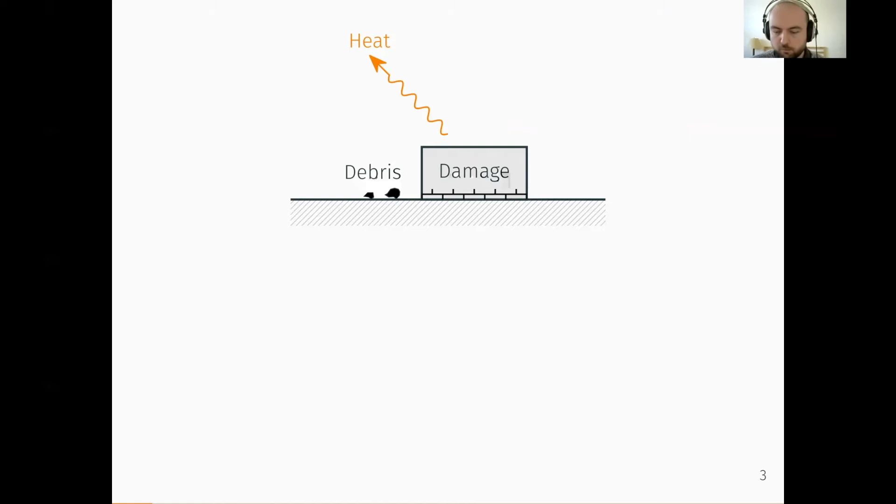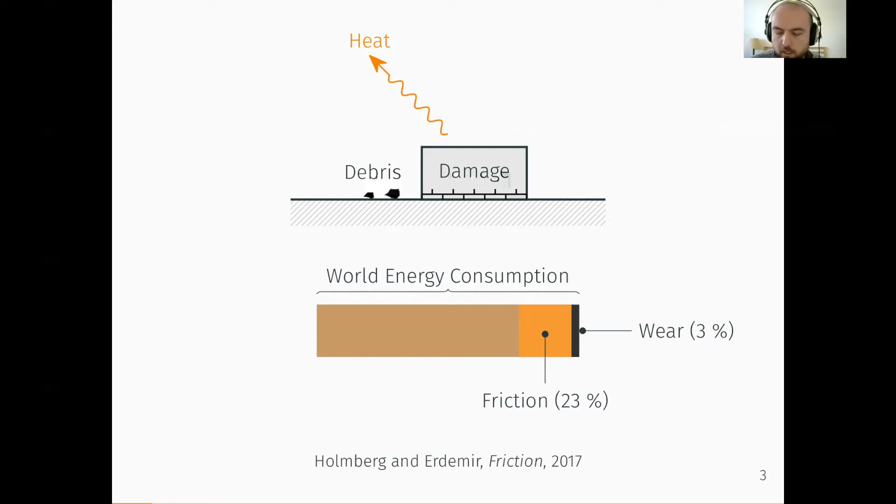As a researcher, I'm interested in solid interfaces and what happens when two solids slide on top of each other. You might know that you have energy dissipation due to heat. You might also have damage at the contact interface, and this damage can lead to the formation of third-body debris particles that leads to wear of materials. One of the reasons we're interested in this problem is because together friction and wear account for 26% of world energy consumption, and since we still rely heavily on fossil fuels to generate energy, these turn out to be large amounts of CO2 emissions.

Friction and wear are phenomena that occur virtually on every length scale. We can have friction for earthquakes, for example, at the kilometer scale. We can have friction at the nanoscale. In some cases, for friction, we want to maximize the amount of energy dissipated. Sometimes we want to minimize it. And for wear, wear is basically inevitable, but it dictates the lifetime of our engineering systems, for example, bridge bearings here. So to harness those two phenomena, we need to have good predictive models to be able to design efficient systems.

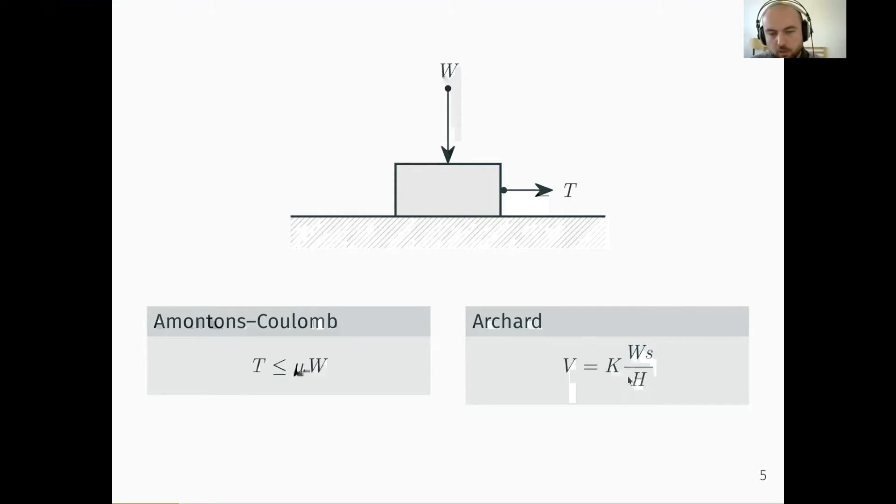However, there are no predictive models for either friction or wear. Here I selected two rather simple models for friction and wear. You have the familiar Amontons-Coulomb friction law with the friction coefficient, and simple wear law, which is the Archard wear law, which states, if you're not familiar with it, that the wear volume is proportional to the normal force times the sliding distance divided by the hardness of the materials in contact. What both of those models have in common is that they need a coefficient: K is called the wear coefficient, and mu is the friction coefficient. Those coefficients need to be informed with experimental measures, and therefore, those models are not predictive.

What they also have in common is a linear dependency on the normal force and an absence of dependency on the apparent contact area. In both of those equations, the size of the contact, the apparent contact, does not play a role. We've known this for a few centuries now, because Da Vinci actually did experiments on this, where he was measuring the static friction force for different orientations of a single block, and he found that the orientation of the block had no bearing on the static friction force. Now, the reason this is the case is due to inevitable roughness that occurs at the interface. And roughness is a fundamental aspect of tribology, and it governs a lot of what we observe at the macro scale for friction and wear.

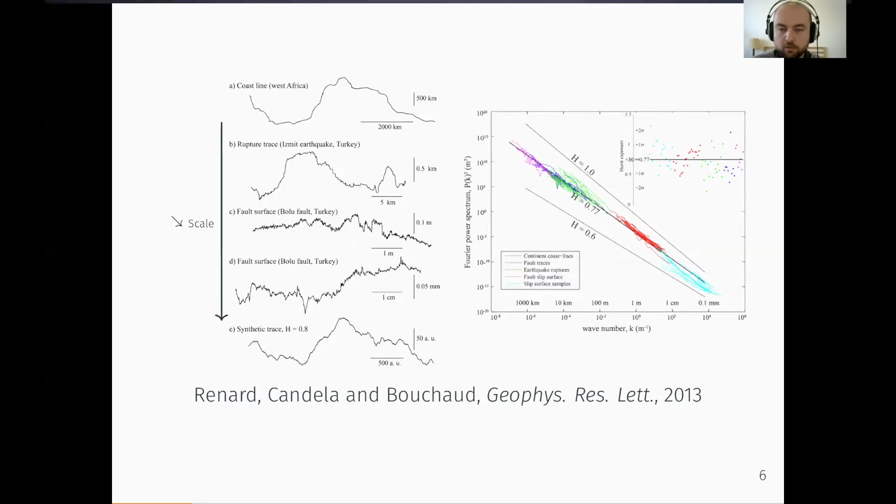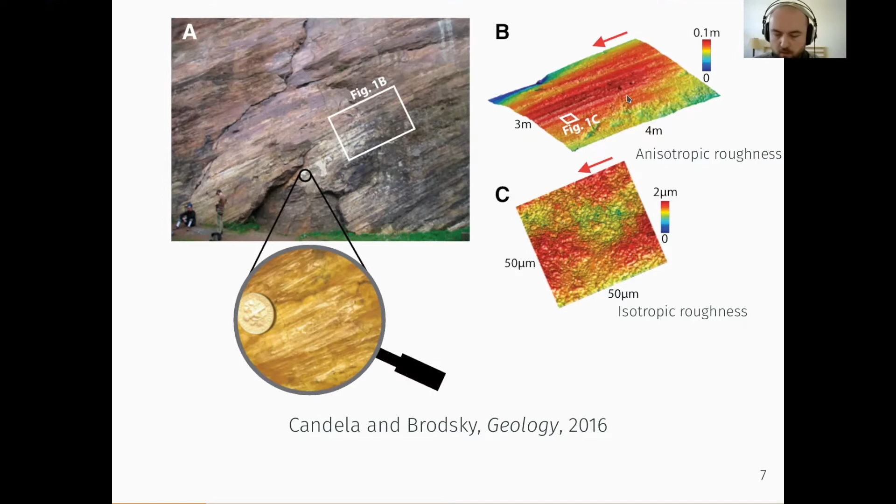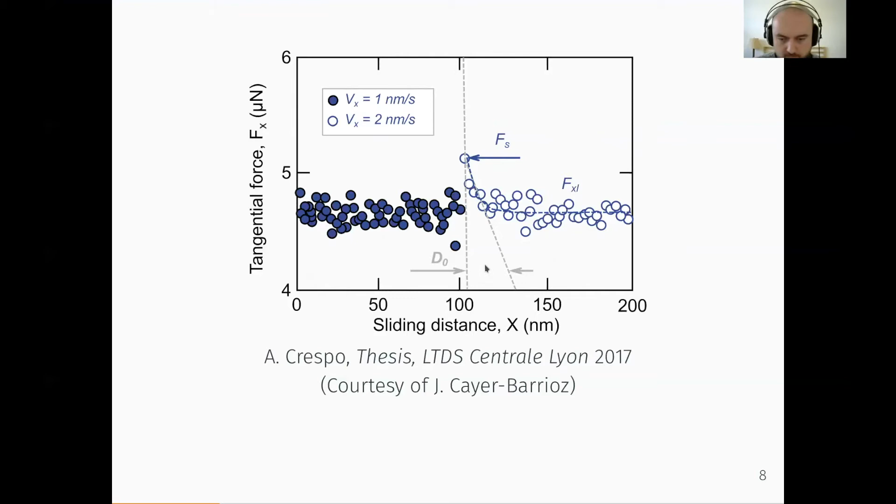What I want to discuss today are two approaches which I think are complementary and necessary to model friction and wear. There's the continuum side of things, which I focused on during my PhD, which I think is necessary to bring some of the mechanisms we know from the nanoscale up to engineering scales.

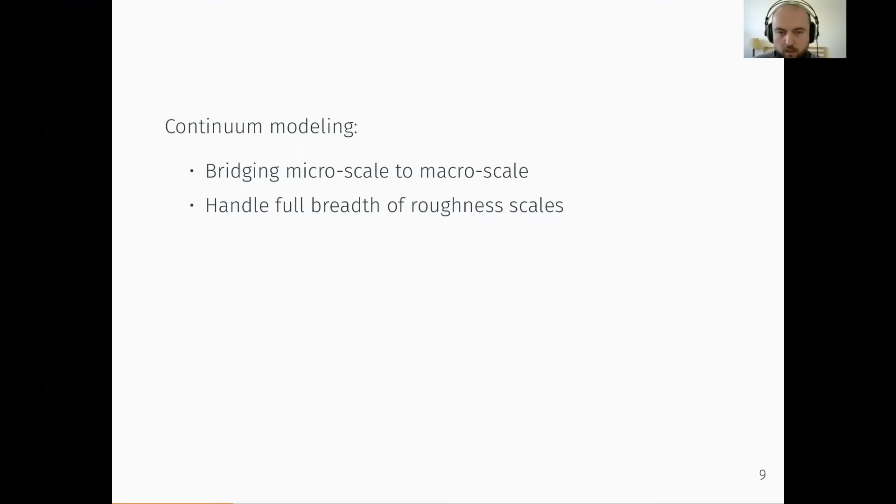And to do this, we need to account for the full breadth of roughness of natural surfaces. What I've been doing during my postdoc is focused more on atomistic modeling, exploring the physics of nanoscale friction and wear. Those can be used to inform the continuum scale models that are going to be used to homogenize and scale up to engineering scales.

The presentation is split into 3 parts. The first two deal with continuum modeling of rough contact interfaces. We'll talk about this in the first part, and in the second part we'll discuss plasticity and its influence on crack nucleation at contact interfaces. The last part will deal with molecular modeling, where we'll discuss aging friction at the nanoscale.

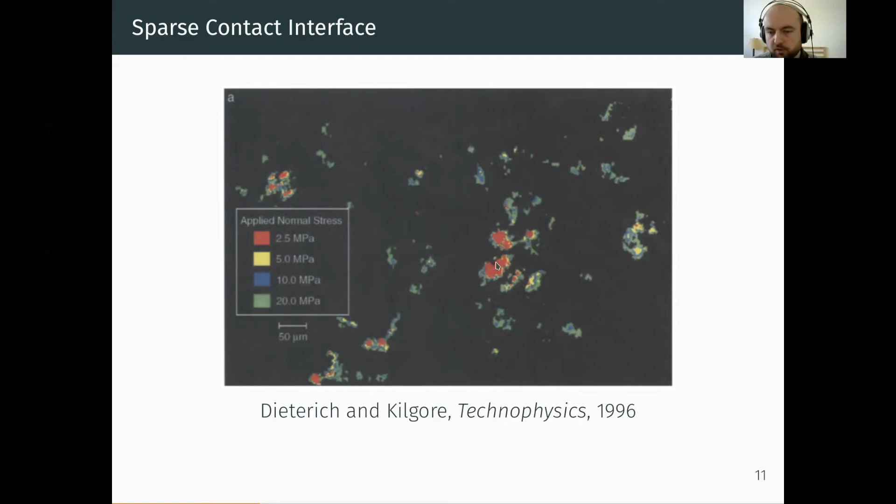You might think that since the true contact area, where forces are transmitted, is so small compared to the apparent contact area, the local pressures must be really high. They are actually high enough that they cause irreversible damage or deformations in the bodies in contact. We've known this for a while, but I find the experiments by Daniel Bonn and his team to be really visual in showing this.

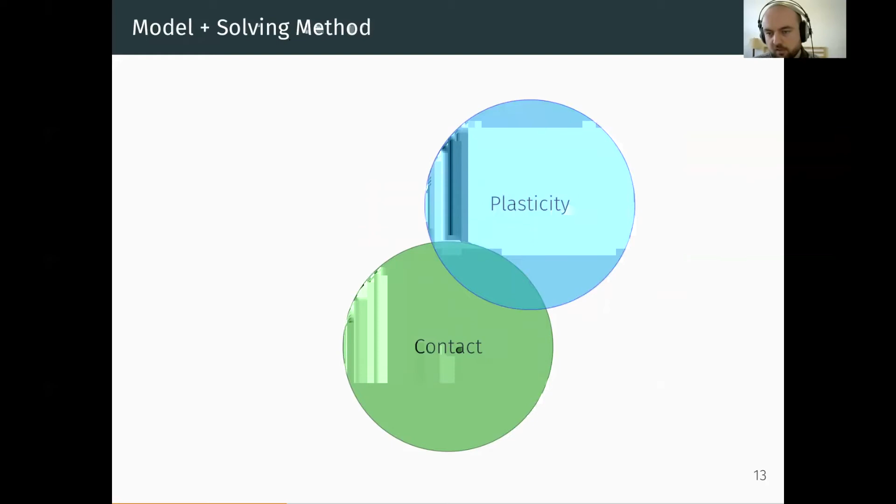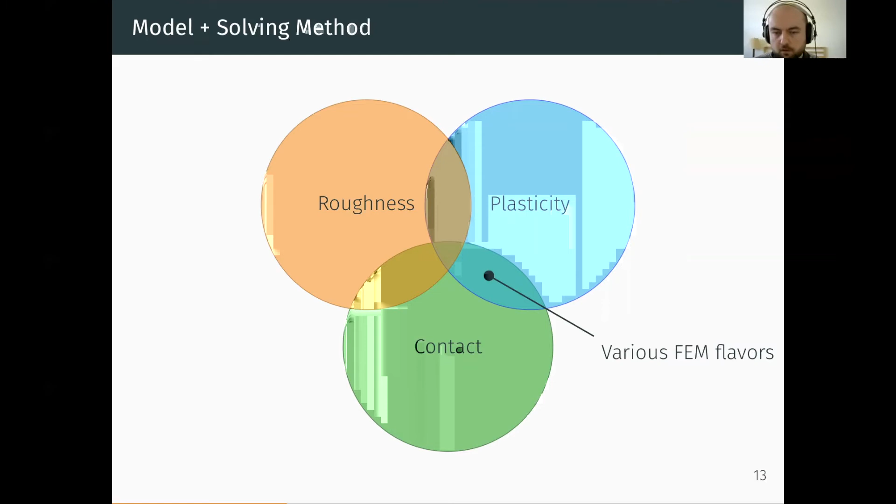And there are methods that do both. There are various finite element contact schemes that can handle both of those. But we also have an additional constraint, which is to account for the multi-scale aspect of roughness. This usually means we have to discretize our contact interface very finely, because we want to represent all the details of the true contact interface.

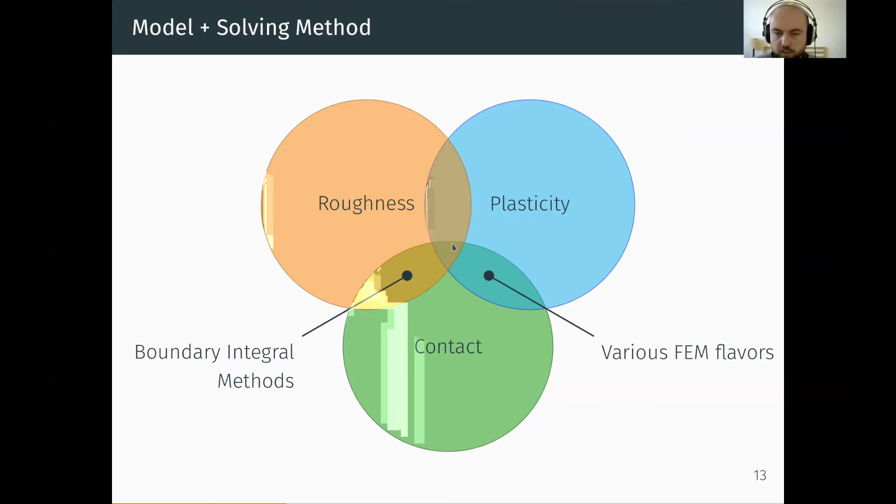And there are methods that do roughness and contact, but don't do plasticity. Those boundary integral methods are very interesting, and I will go into them a bit later, but we want to be really at the center of this Venn diagram here and do all 3 things at once.

So some people have done that with finite elements, namely Mark Robbins and Jean-François Molinari. However, there are some shortcomings to using finite elements. One is that in order to avoid any effect of boundary conditions on the contact interface, you need to discretize a volume larger than the volume of interest where you expect plastic deformations.

You can alleviate some of the computational burden by using a dynamic relaxation scheme, but for plasticity this may not be an appropriate way to model plasticity because it's path dependent.

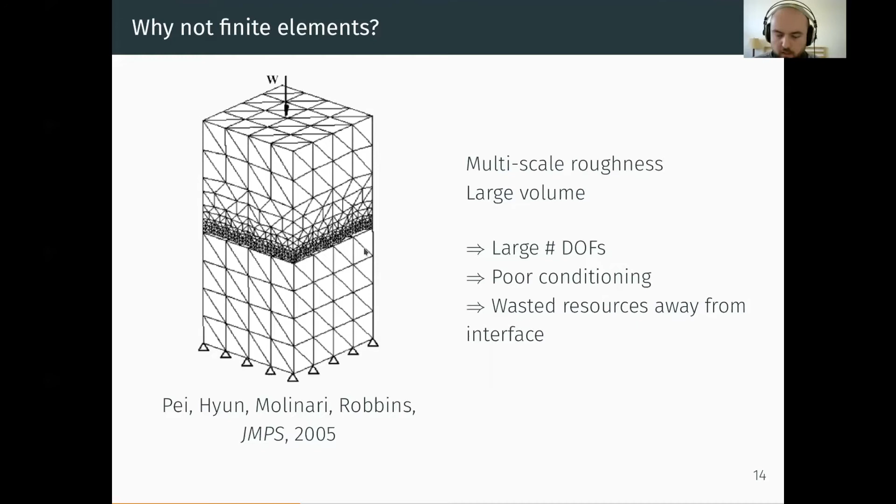So there are some issues with finite elements, and ideally we would try to solve those issues by having a numerical method which would allow us to discretize as finely as we can the contact interface, and a part of the volume where we expect to have plastic deformations. Anything else outside of this would be taken care of because it's elastic and we wouldn't need to actually explicitly discretize it.

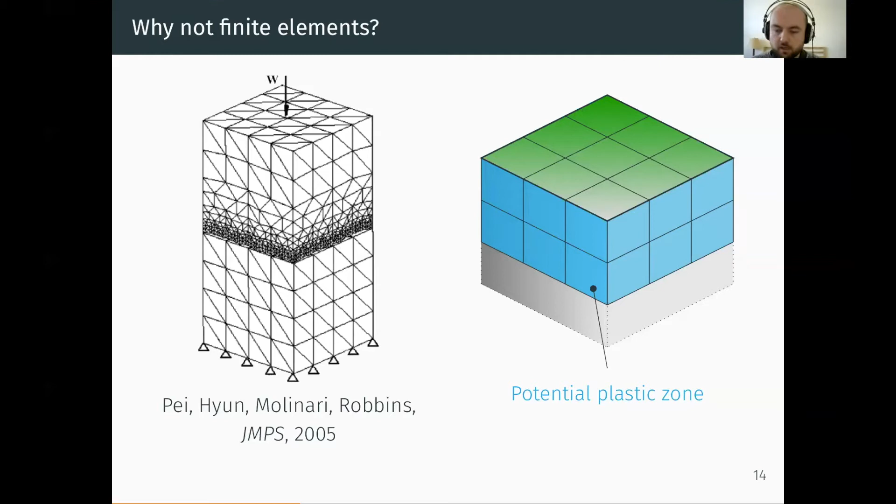So I've talked about methods that work really well for elastic contact with multiscale roughness, and those are boundary integral methods. They revolve around the principle that you can express equilibrium surface displacements as a function of contact pressures using this convolution integral, and the kernel you use is the displacement due to a point force acting on an elastic half space.

So if you can write your equilibrium using this equation, you can also write your potential energy, and elastic contact basically becomes a minimum principle of minimum potential energy under the constraint that the separation of the two surfaces should be greater than or equal to 0.

Now, the main computational burden of this kind of method is to compute this convolution integral efficiently. One of the best ways to do that is to go to the Fourier domain to be able to compute it.

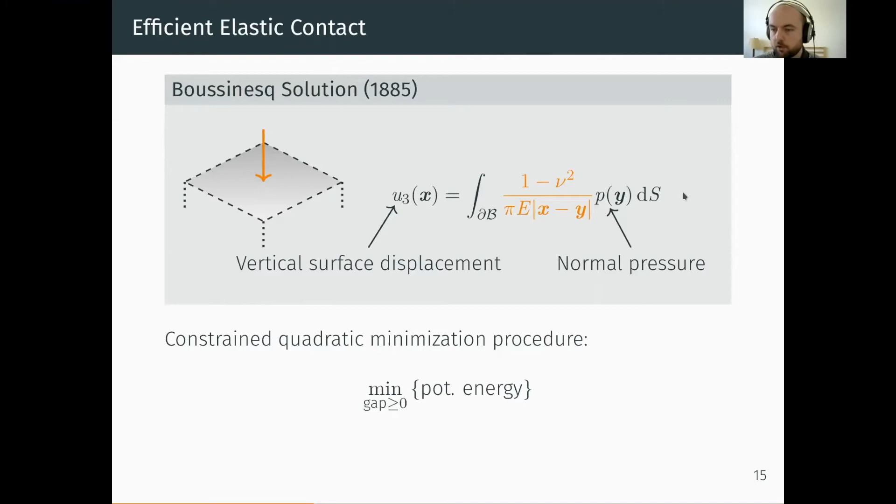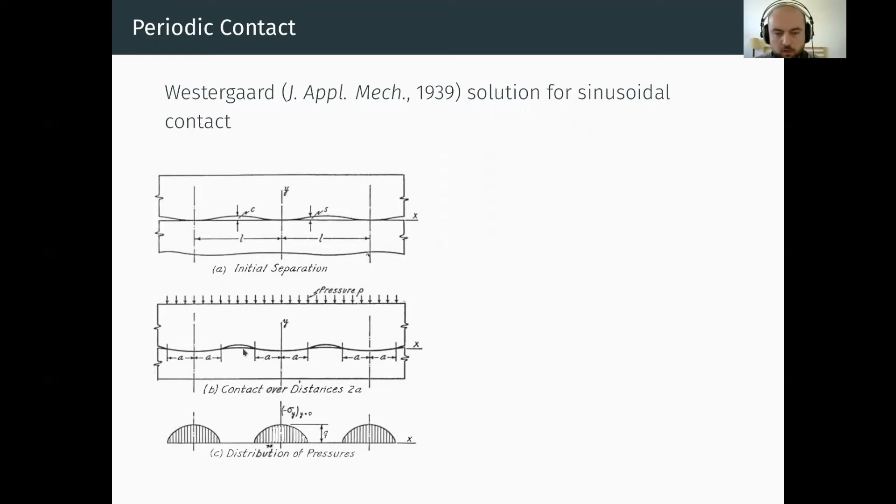Historically, that's what people have done. They've used a contact solution from the late 1930s, which is the solution of a sinusoidal rigid surface on top of an elastic half space. The contact solution is very interesting because as you push the contact until you have no surface separation, you have a correspondence between your displacement and the sinusoidal contact pressures, a proportionality between the two.

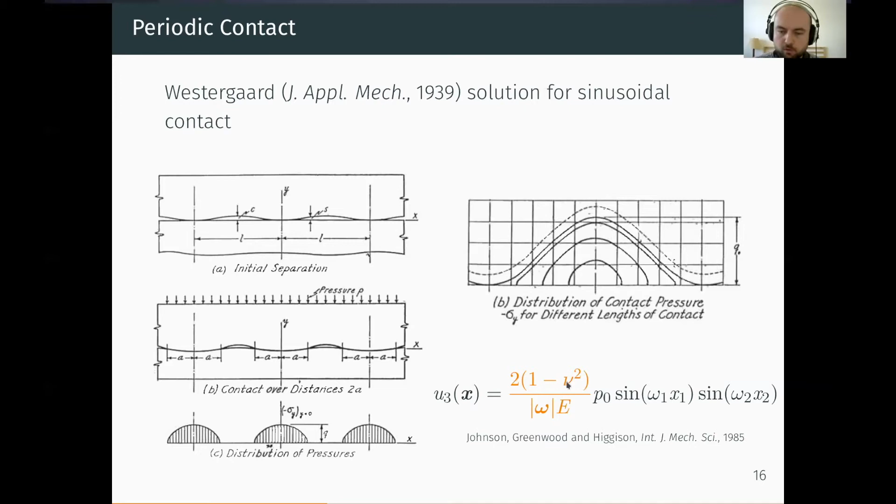This coefficient can be generalized to 2D if you have a 2D surface. You can very well imagine how this can be efficient in computing a convolution integral, because using methods such as the fast Fourier transform, you can decompose contact pressure into a set of modes, apply this coefficient to each mode, and then recompose your equilibrium surface displacements using the inverse Fourier transform.

So those are, in a sense, FFT-based boundary integral methods. They're very nice for elastic contact because they're really efficient. They focus all of the computational resources on the interface — we don't discretize anything inside the volume of the bodies in contact. They're really fast because of the fast Fourier transform, and rather easy to implement because FFT libraries are readily available.

So when I set out for my PhD, my initial goal was to try to retain those features to do elastoplastic contact.

One way I could have gone, and something that people actually do in the literature, is to leverage the principle of hardness. Basically, if you have an indenter that you push onto an elastoplastic solid and you increase the load, if you measure the mean pressure at the contact, this pressure increases and saturates at a level that's about 3 times the yield stress for a spherical indenter.

So you could use this physical principle to modify your elastic contact problem and say that you want to minimize the potential energy under the separation constraint, and an additional constraint which states that the contact pressures should always be smaller than the hardness of the material.

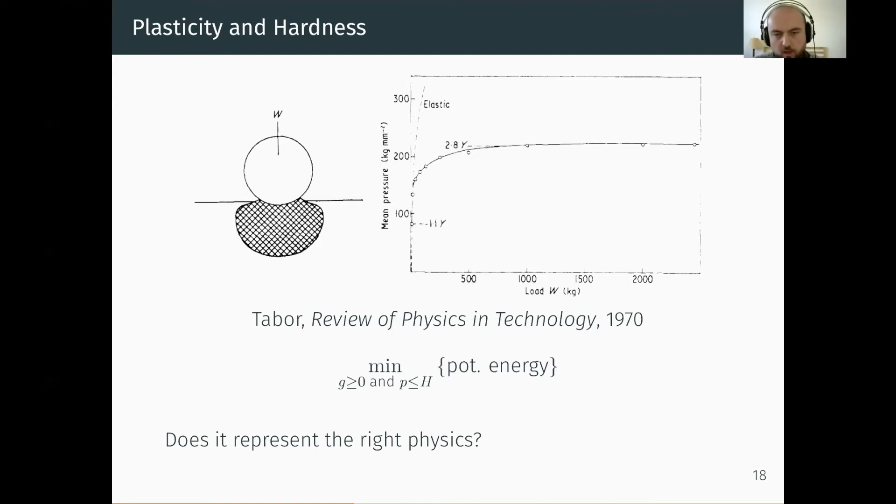What I did was to devise a method based on volume integral representations. So I have a half space with contact tractions and a distribution of plastic deformations, and what I want to do is express my equilibrium displacements as a function of those two quantities.

For the contact tractions, I have this boundary term, which is very similar to what I just showed before with boundary integral methods. And I have an additional term that takes care of the plastic deformation.

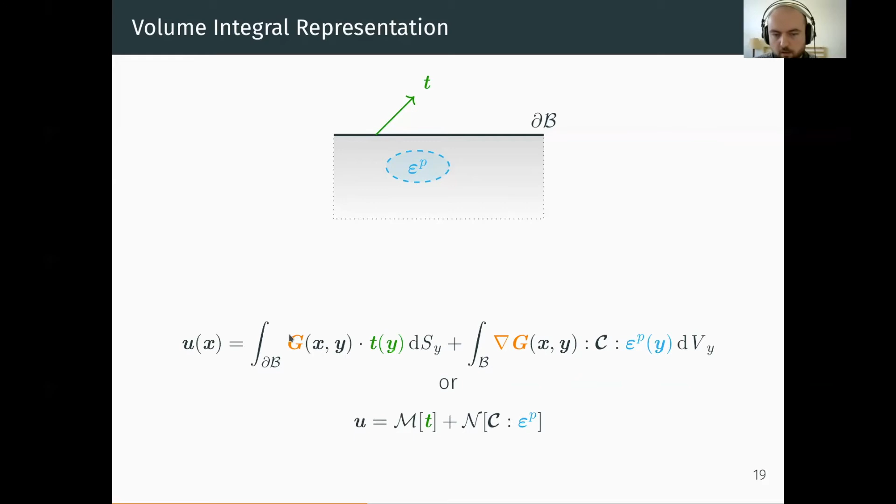This expression here I can only write if I choose wisely the Green's function, G — this is just a shorthand for later on in the presentation. So I need to choose a Green's function that is appropriate so I can write this equation.

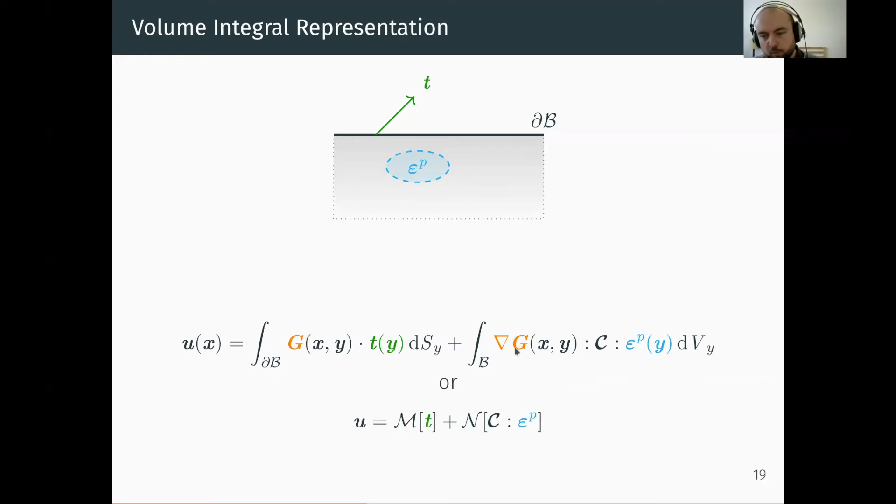Typically in integral methods, people use the Kelvin fundamental solution as a Green's function, which is a point force acting inside an infinite elastic medium. However, I cannot use this Green's function to write the previous equation.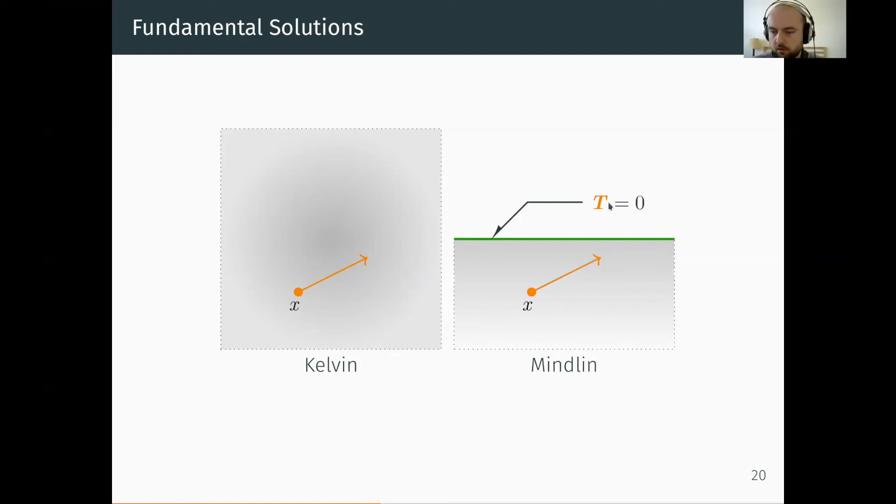So the tractions of this solution, the surface traction, should be equal to zero. This is what allows me to write the integral I showed in the previous slide. So in order to compute equilibrium displacements, there's this boundary integral term, taken care of by the same methods I showed before with the FFT, and there's this volume integral term that I need to compute as efficiently as possible.

There is, in my problem, a translational invariance in two directions, y1 and y2, which means I could use 2D FFTs to accelerate the computation of this integral.

However, when I started my PhD, the Mindlin solution I have to use here, this G, was only known in the physical domain. So I would have to either compute the convolution in physical space using a different acceleration scheme than the FFT, such as a fast multipole method, but that would defeat the easy-to-implement condition I took. I could also use a discrete Fourier transform of this Mindlin solution, but that would introduce a sampling error, because I need to sample the analytical solution, and I'd also need to store all the Fourier coefficients, which takes up a lot of memory.

So what I did during my PhD was derive the Mindlin solution in a partial Fourier domain. I did a Fourier transform in the y1 and y2 directions, and solved equilibrium for the Mindlin solution directly in this hybrid system of coordinates. That allows me to cancel any sampling error I would have had from a discrete Fourier transform of the physical space solution, and also reduces memory cost because I don't need to store any Fourier coefficients — I have the analytical solution and can compute it on the fly.

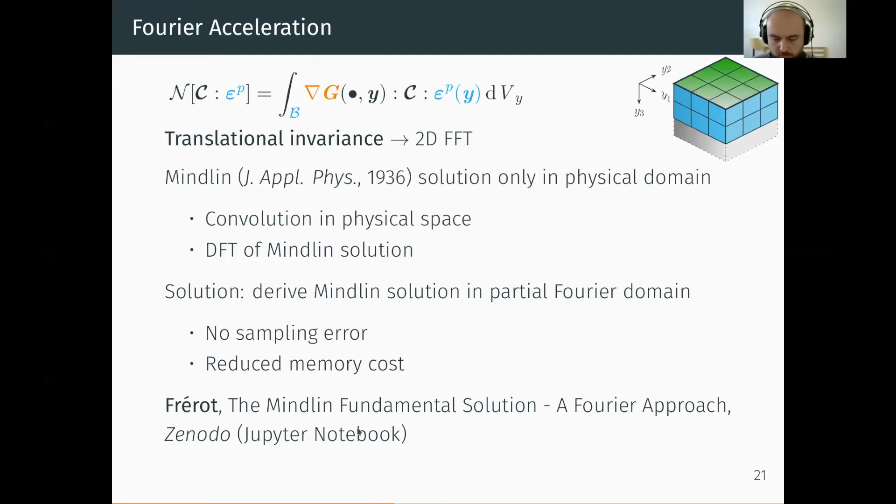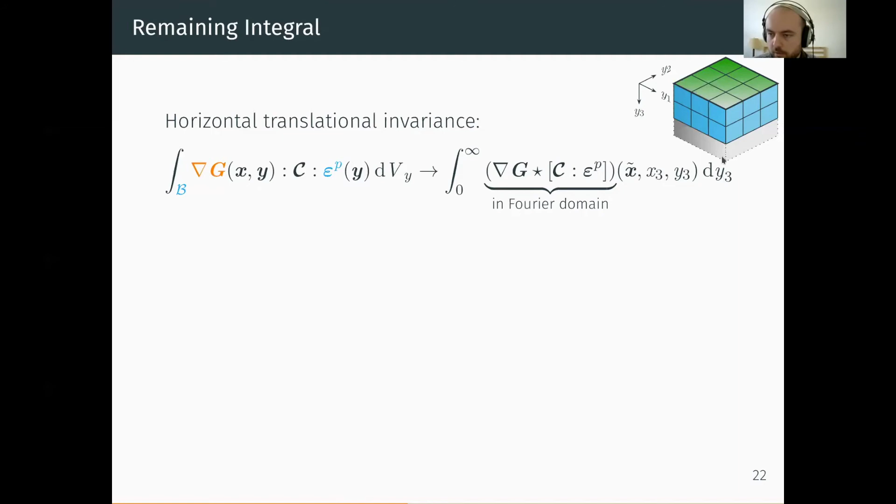Again, our goal is to compute this integral as efficiently as possible. I've shown that thanks to translational invariance we can compute part of this integral in the Fourier domain, but there's still a direction where we don't have translational invariance — that's the y3 direction. So we still need to integrate over y3.

Naively, if you look at this expression, for each value of x3 where you're interested in computing the displacement, you need to integrate over all the values of y3. So if you discretize, that would give quadratic complexity on the number of points in depth. However, thanks to my knowledge of the analytical solution of G, I can use some clever mathematical tricks to accelerate this computation, and finally recover the n log n complexity, which was my target from the start.

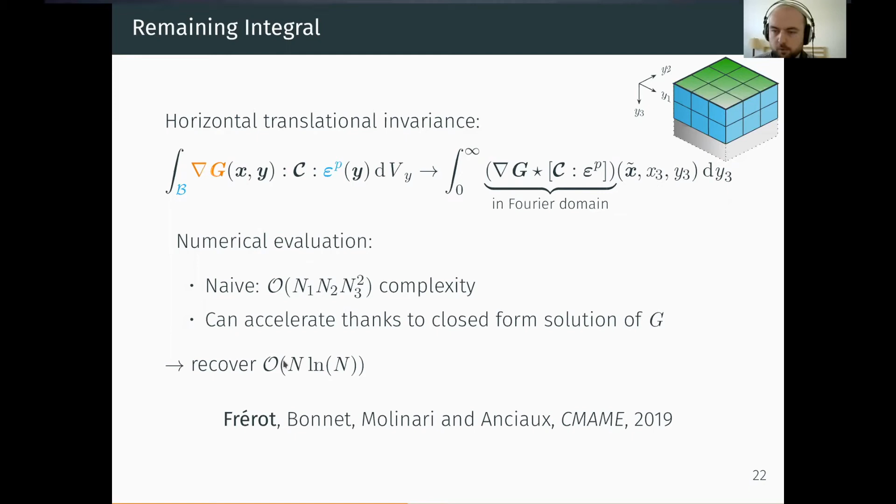Again, feel free to ask any questions about the details of this, or check out this publication if you want. So I can now efficiently compute equilibrium solutions if I have a set of contact tractions and a set of plastic deformations — both of those are unknowns — and I will now discuss how we find plastic deformations.

What we do is write this same equation, differentiate on each side to express deformation instead of displacements, and write it in incremental form. This gives the same information: I have the increment of total deformation as a function of the increment of contact tractions and the increment of plastic deformations. Here you can plug in any continuum plasticity formulation.

If you take something like a radial return from von Mises plasticity, the increment of plastic deformation depends on the increment of total deformation. So you have a nonlinear implicit equation, which can be solved if you recast the problem into a root-finding problem and solve with your favorite kind of nonlinear solver.

They do need to be matrix-free, though, because we don't want to assemble tangents for this function — those operators are full, and it would defeat the purpose of having worked all this way to get an n log n scaling for computation of equilibrium solutions.

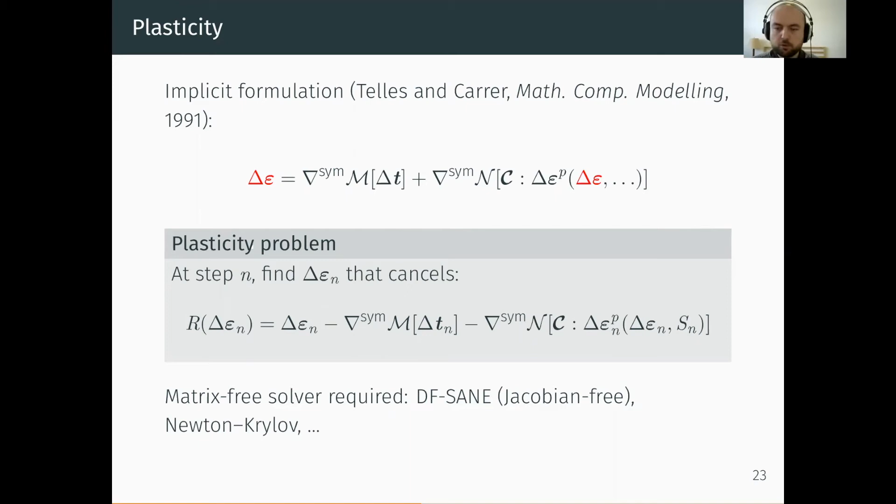Finally, if we put everything together, there are two parts in the elastoplastic contact algorithm. There's a contact part, which is basically elastic contact. It assumes that the plastic deformations are constant, and it iterates to find new contact tractions. When we converge here, we can send our updated contact pressure to the plasticity problem, which is this root finding problem. Once we've converged for this, we have new plastic deformations which inform our contact problem, and we go on and on like this until we've reached convergence.

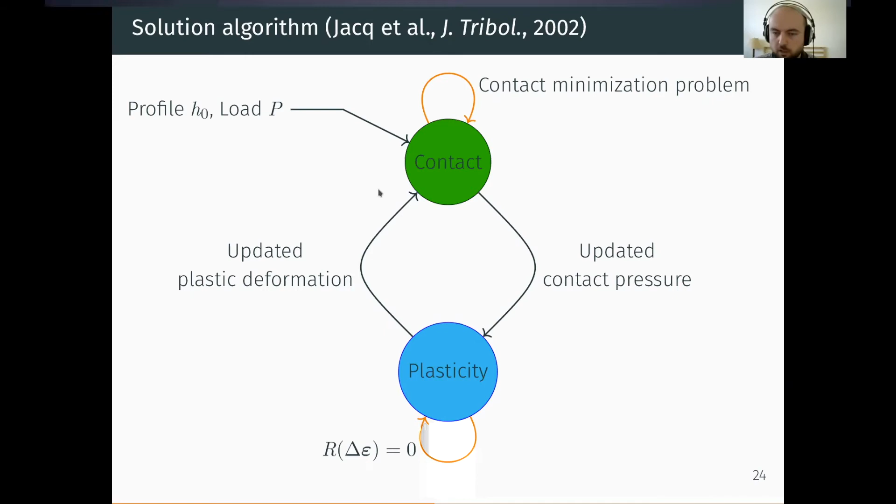This simulation was done with a code I wrote in C++, which is parallel and high performance. It's called Tamaas, and it's completely open source. Feel free to check it out if you want.

So I've showed you a way to do elastoplastic rough contact, and I'm going to try now to apply it to a practical problem of wear modeling and the influence of plasticity on crack nucleation.

So let's discuss a bit of wear modeling. There have been some studies in the past 5 years, particularly in Jean-François Molinari's group, on microscale or nanoscale mechanisms of adhesive wear. If you're not familiar with this, or if you missed Jean-François's seminar a few months ago, just to recap a bit: there's a critical length scale to nanoscale wear.

Basically, if you have two asperities that collide, and the contact is smaller than a critical length scale, you have plastic deformation, and you have no detachment of debris particles. So essentially, you have no wear.

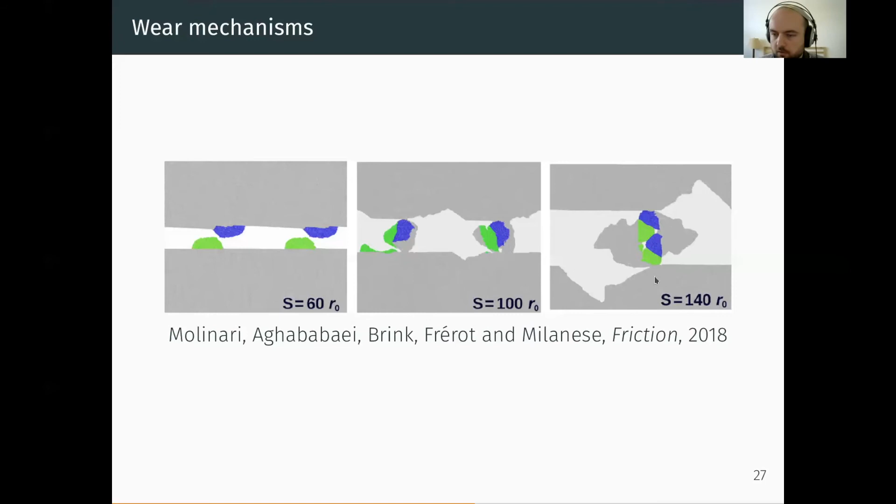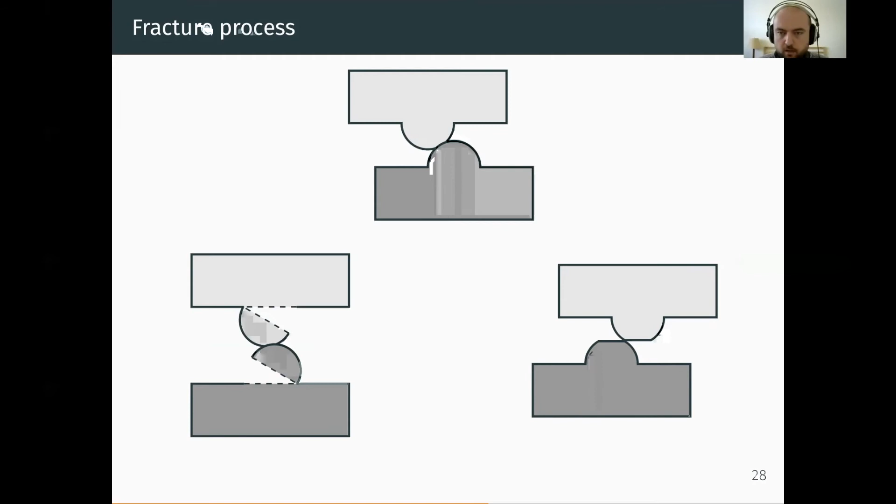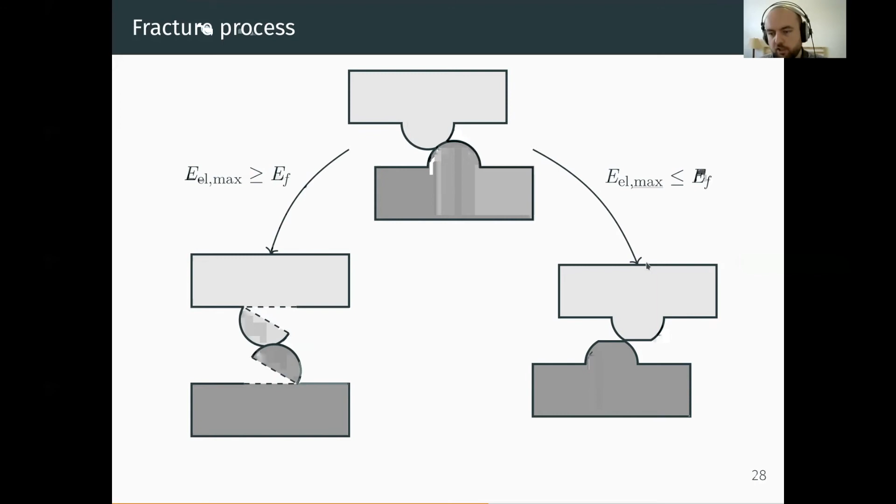Essentially, what those studies have shown is that adhesive wear is a fracture process. So if you have enough elastic energy that is stored in your contact to form new crack surfaces, then you're going to have this brittle mechanism which leads to detachment of a debris particle. And if you don't have enough energy, then you have plastic deformation and the asperities just pass each other, and there's no detachment of debris particles.

But that's not the full picture, because if you want to model such a phenomenon on the scale of a rough surface with many rough contacts, you need to do crack nucleation. So either by defect or stress concentration, or if you have a cohesive zone modeling, for example, you could use critical nucleation stress or other kinds of models which include crack nucleation.

And you need to have crack propagation with the energy dissipation, which I just showed, and interaction via bulk forces. This is something that can be done with molecular dynamics - it's very natural in MD to do it. And you have here the interaction between two cracks, which leads to the detachment of a single debris particle.

However, with the methods I've showed you earlier in this presentation, I can only do elastoplastic contact. I cannot do crack propagation yet. That's something I'm interested in, but cannot do currently. So because I have a homogeneous flat half space, I don't also have defect or stress concentrations. And so I'm going to focus on having a crack nucleation stress.

So the question I want to try to answer is: how do I quantify the probability that a microcontact in a rough contact interface with many, many microcontacts will have a crack in its vicinity? And in particular, I want to understand what is the effect of plasticity on this probability.

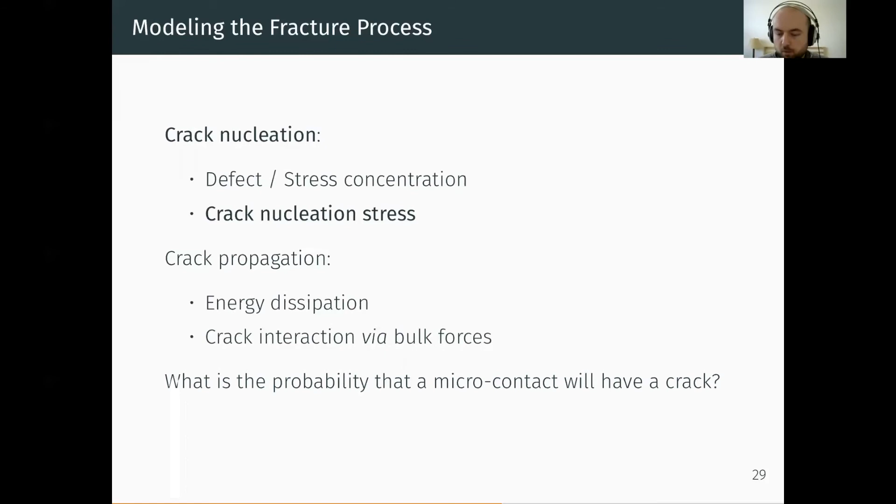To do this, I did a set of rough surface contact simulations, where on each simulation, I look at the principal tensile stress at the surface. And I look at zones where the principal tensile stress is larger than the critical stress for crack nucleation.

I did two sets of simulations. I did a set of simulations with a full description of plasticity, with von Mises plasticity in this case, using the method I described to you. And I did also a set of simulations using this elastic contact with added hardness condition. This is what I call saturated plasticity.

So what I do to compute this probability that a contact will nucleate a crack is I count how many crack nucleation sites I have in my total system, and I divide it by the true contact area. This quantity turns out to be proportional to the probability of forming a crack.

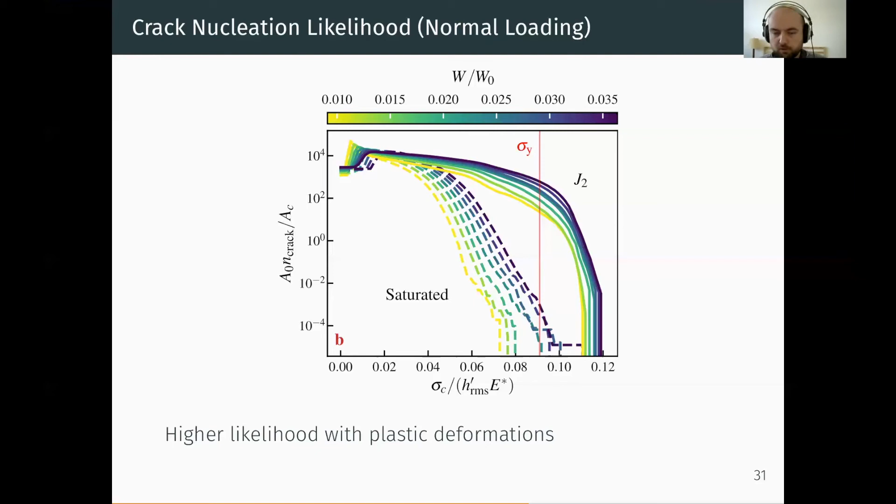I also did simulations where I do a normal loading and apply a shear stress to simulate the onset of sliding. In the saturated case, where deformation is basically elastic, I have an increase in my crack nucleation likelihood as I increase the load, because the tensile stresses in the system increase. But in the case of having a full description of plasticity, I don't have this increase - the probability is basically unaffected by the application of a shear stress in this case.

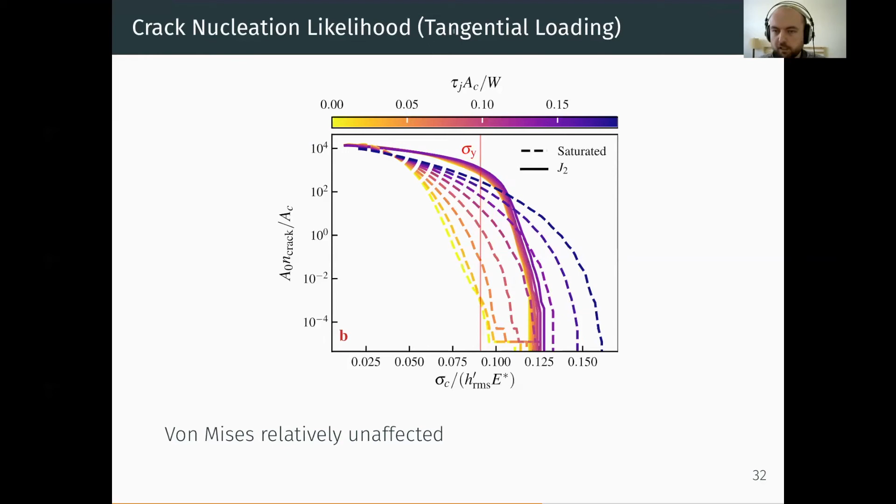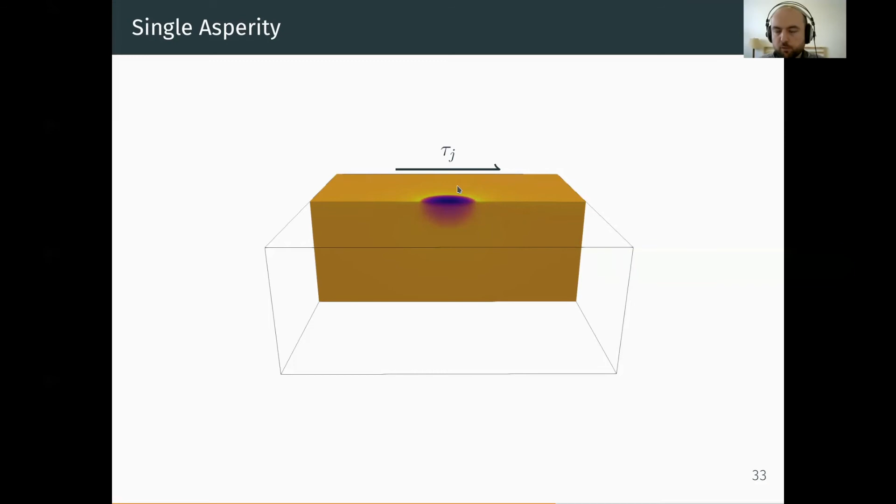To rationalize these observations, I did simulations of a single asperity where I push a spherical indenter onto an elastoplastic half space. I shear it with tau j, and I compute the principal tensile stresses at the surface. What I get is this curve of sigma 1 as a function of tau j.

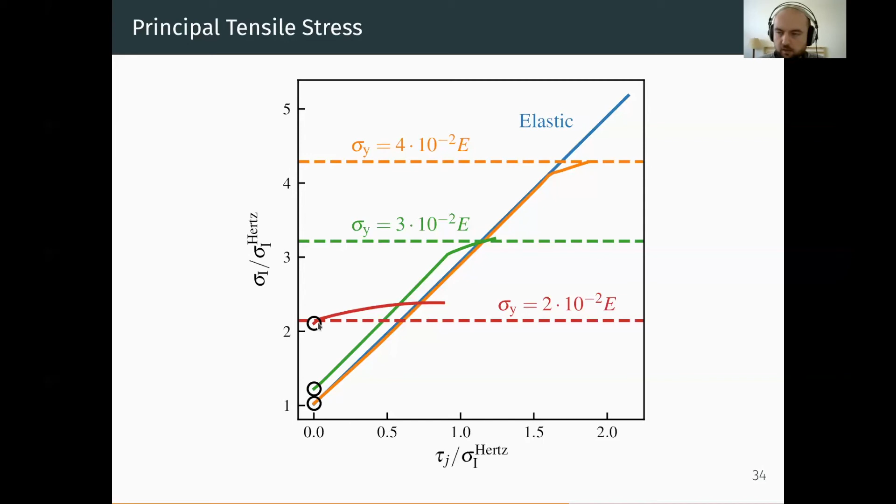This is when tau j is equal to 0 - this is pure normal contact. As we get softer and softer, as we decrease the yield stress, we have higher tensile stresses in the system. This explains why we had a higher crack nucleation likelihood in the case where we had a full description of plasticity, because plastic deformations introduce tensile stresses. When those plastic deformations reach the surface, the effect of those additional tensile stresses is the largest. So we have subsurface plasticity that introduces tensile stresses and increases the crack nucleation likelihood.

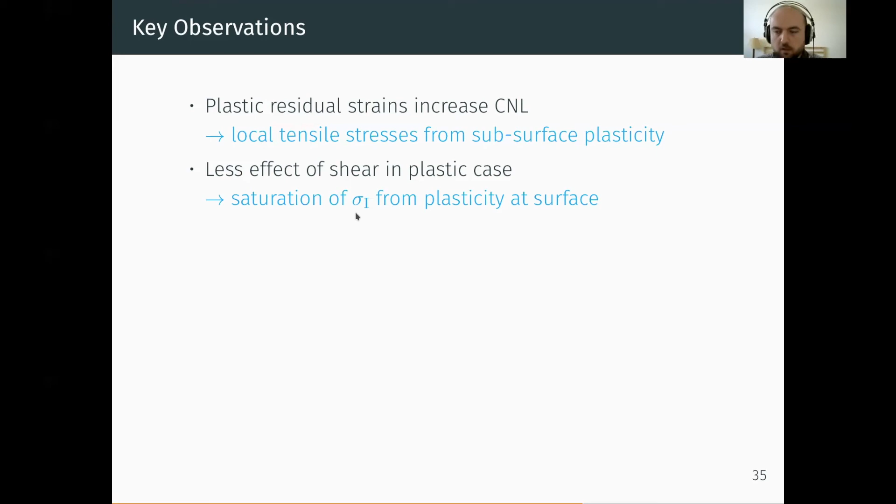And again, we see the saturation effect of sigma 1 due to plasticity, and this is why we don't see as much of an effect when we have shear stresses. So what I want you to take away from this is that a more ductile material, a softer material, is more likely to crack due to subsurface plasticity.

This isn't something that's been directly observed in experiments, but this is something we expect from Archard's wear law. We expect to have more wear volume as we decrease the hardness, as we get softer and softer materials.

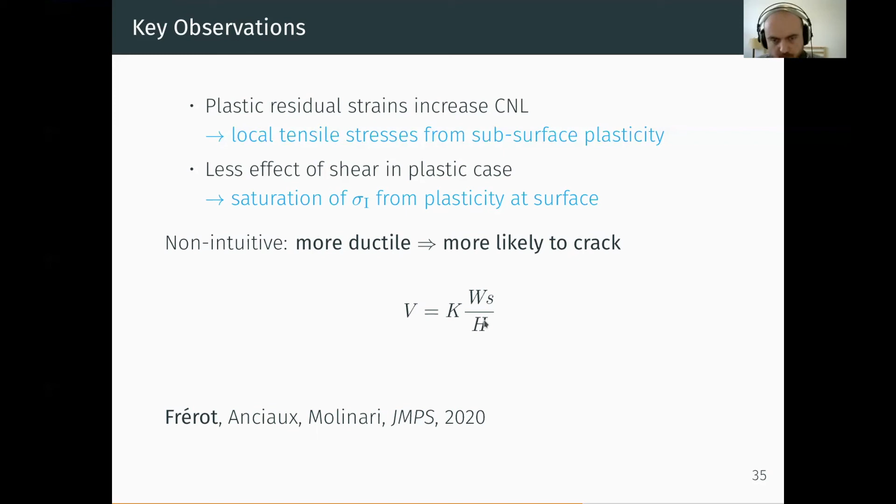So that's the end of the continuum part. I've showed you what I think is an efficient method for rough surface elastoplastic contact, and I've applied this method to trying to compute a macroscopic quantity, this crack nucleation likelihood, on a rough surface interface for adhesive wear.

Now, when I started my postdoc, I wanted to improve my knowledge of what happens at the nanoscale, of the physical phenomena that actually give rise to the macroscopic picture that we see.

And I was fortunate to work on a very interesting project that deals with fatty acid coatings and their frictional properties. So those coatings, generally in solution, can be used to decrease the friction coefficient at the sliding interface.

What you typically do is you have a solution of a fatty acid such as this molecule, you spread it across your surface, and what happens is that this hydrophilic group tends to bind to the surface. And the molecules self-assemble into a monolayer. There's typically only one molecule thickness on top of the surface where the molecules bind. And the interaction between the tails of those molecules is what gives the decrease of the friction coefficient.

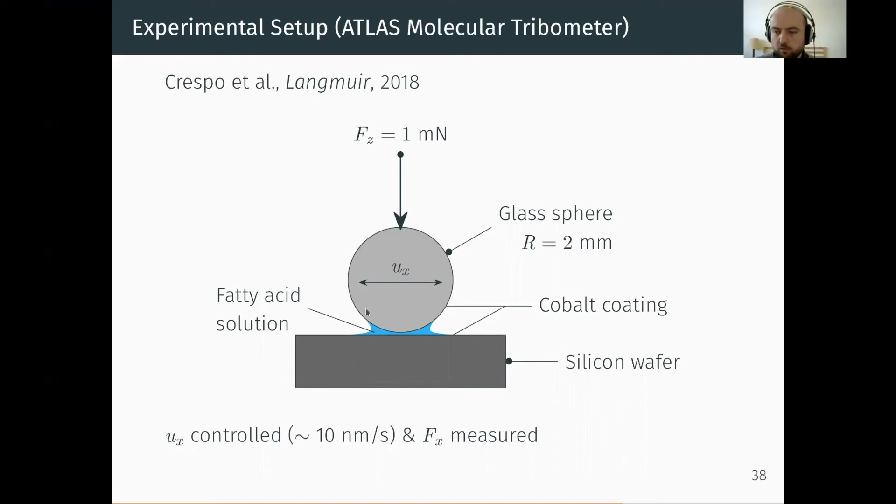One of the things they observe, which I think is really interesting, is an aging phenomena. What they do in the experiments is that they slide, they measure friction force, they stop sliding and they measure the force that relaxes to a non-zero value. And when they reslide, when they start sliding again, what they observe is an overshoot in the friction force. And this overshoot decays as a function of sliding distance over a distance that they measure is about 5 nanometers.

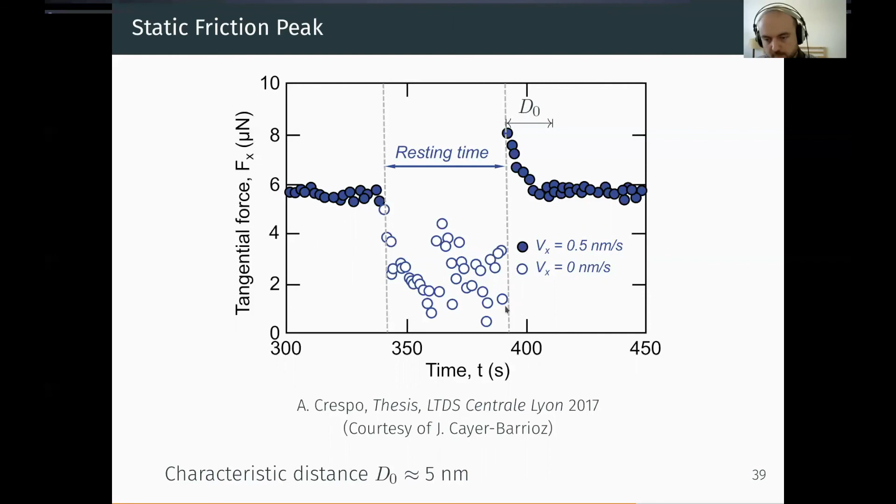What they also measure is the increase in this friction force, the magnitude of the overshoot. And what they observe, they measure this magnitude as a function of waiting time. And what they observe is a logarithmic aging of this overshoot in the friction force as a function of waiting time, for times that are above 2 seconds. For anything less than 2 seconds, they don't observe any overshoot in the friction force.

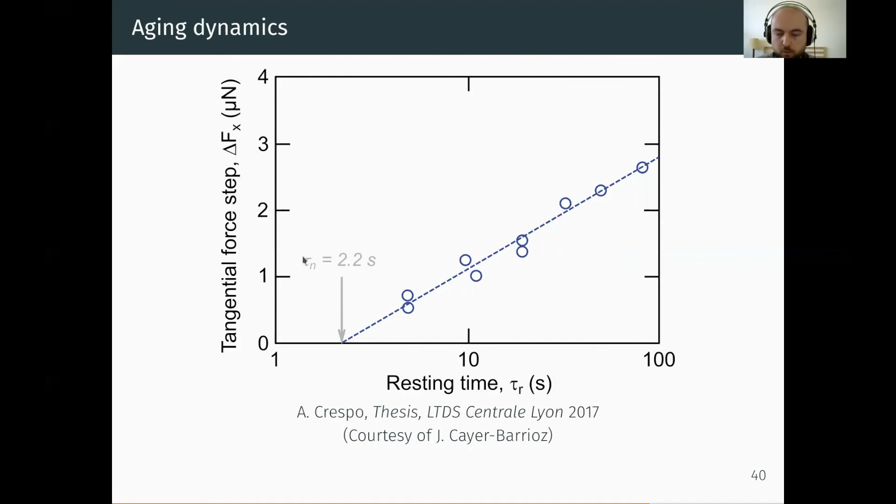So for those of you who are familiar with rate and state friction, this might ring some bells. If you're not familiar with it, it's basically a class of models that are a bit more generic than the Coulomb friction law, in that they include dependency on sliding rate and time as the state. And they were initially developed for rock mechanics, for rock friction.

I'm not putting all of the equations here. What you need to know basically is that there's a dependency of the friction coefficient on the logarithmic of a variable phi, which is called the state variable. And the state variable evolves with the following equation, which includes the sliding velocity and a characteristic distance, which is d0, called the rejuvenation distance.

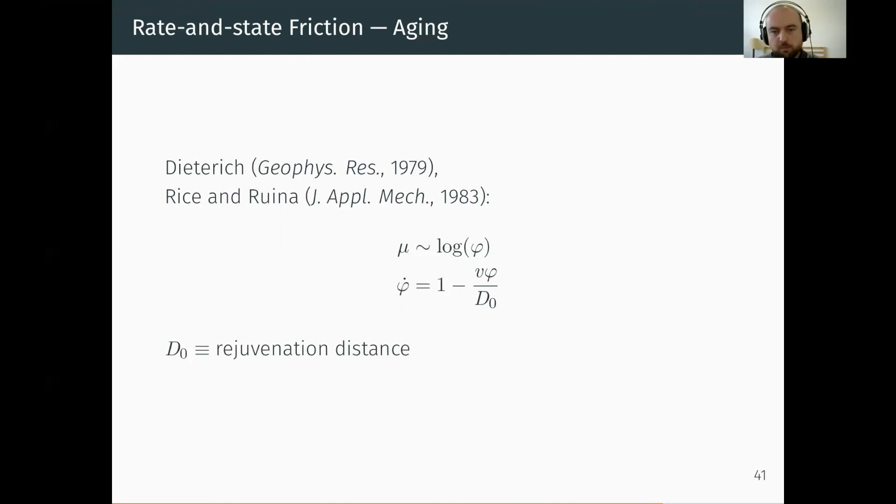So now when I started working on this, I asked myself what would be here d0 in the case where we have those fatty acid coatings. And if we have roughness at the surface, typically d0 is interpreted as the distance you need to slide in order to renew your microcontact population.

So what I did was to take the AFM roughness measurements from the experiments given to me by Juliette and do elastic contact simulations of two sliding surfaces. And what I measure is the survival contact fraction.

So the amount of contact area, the fraction of contact area at a given sliding distance that is common with the initial contact area. This survival contact fraction decays as a function of sliding distance until it reaches a steady state, where basically all memory of the initial contact area is lost. This decay occurs in my simulations over a distance of 40 nanometers.

So those simulations are purely elastic contact simulations that do not include those fatty acid molecules. It's therefore apparent that roughness alone is not sufficient to explain what they observe in the experiment with this d0 of 5 nanometers, because we are an order of magnitude larger.

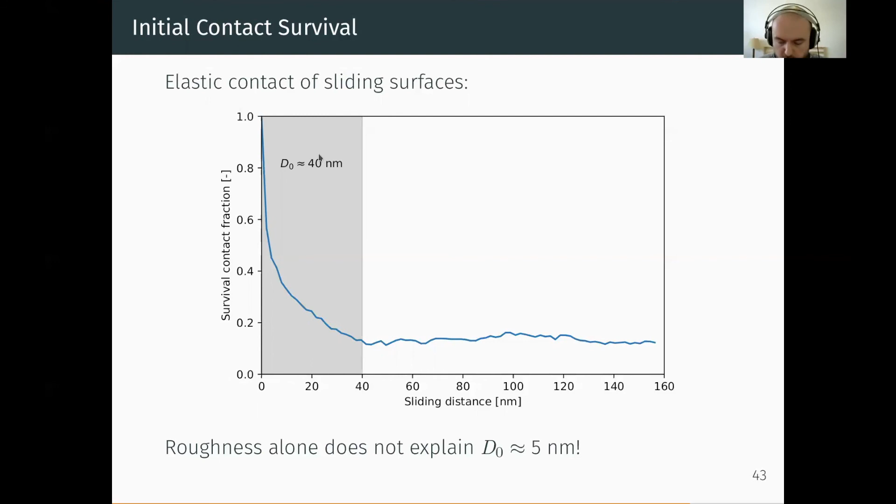So in order to get as close to the experiment as possible, I set up a molecular model for the fatty acid molecules that they use in the experiments. What I did was to use coarse-grained potentials, which allow me to save a bit on computational power, because each bead here represents 2 CH2 groups.

I set up a surface of those fatty acid molecules for the top and bottom surfaces, because we know that the friction interaction is going to emerge from the interaction between the tails of those molecules. I press with a normal force on this system, and I pull with a spring at a given velocity.

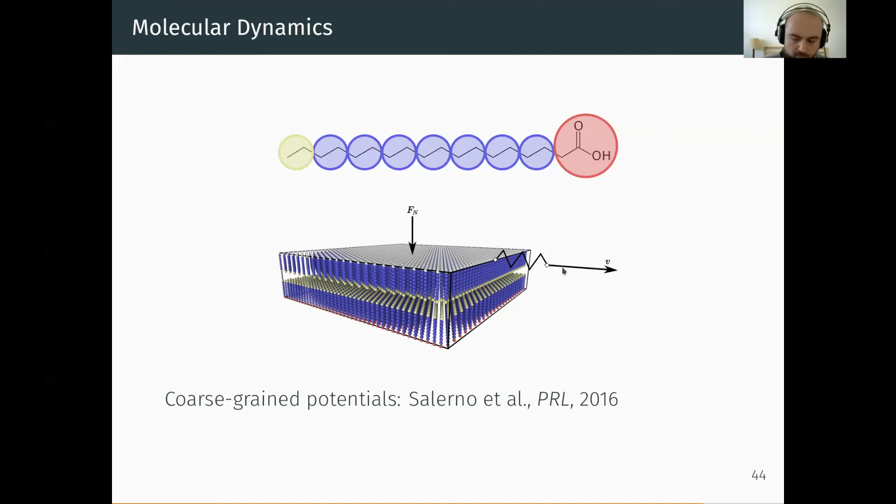Now, of course, I need to have roughness in the system, and I used directly the roughness data given to me from the experiments. I used it to generate periodic surfaces, and included this roughness into my molecular model. So at the end, I have a model that is about 200 nanometers by 200 nanometers, and I can compute my friction force.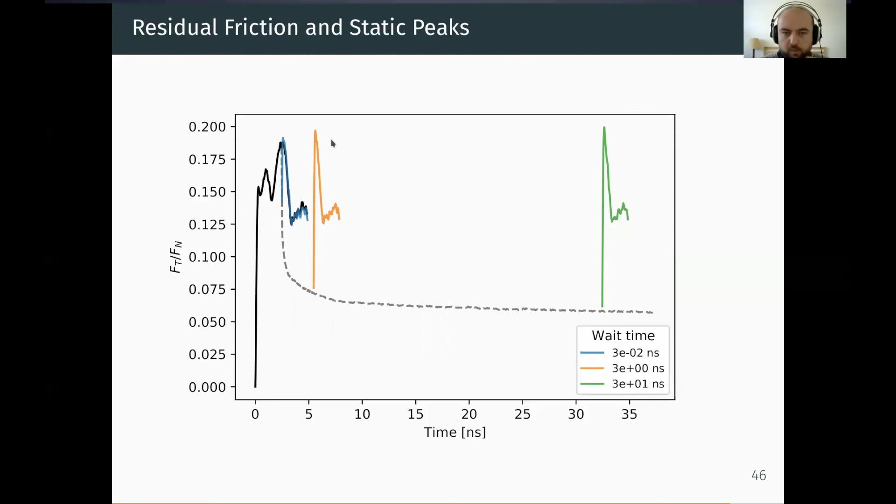You can already see there's a bit of an increase in the peak, but this is more apparent in this figure, where I plot everything as a function of sliding distance. You can see in black the steady state curve, which has no interruption in the sliding process. In blue is a rather low waiting time, and then you increase the waiting time.

So you have this increase in the overshoot of the friction force. This overshoot is a transient that decays and reaches the steady state again after a sliding distance that's about 5 nanometers, so like 51, 52 angstroms. This is something very encouraging that corresponds to the experimental measurements.

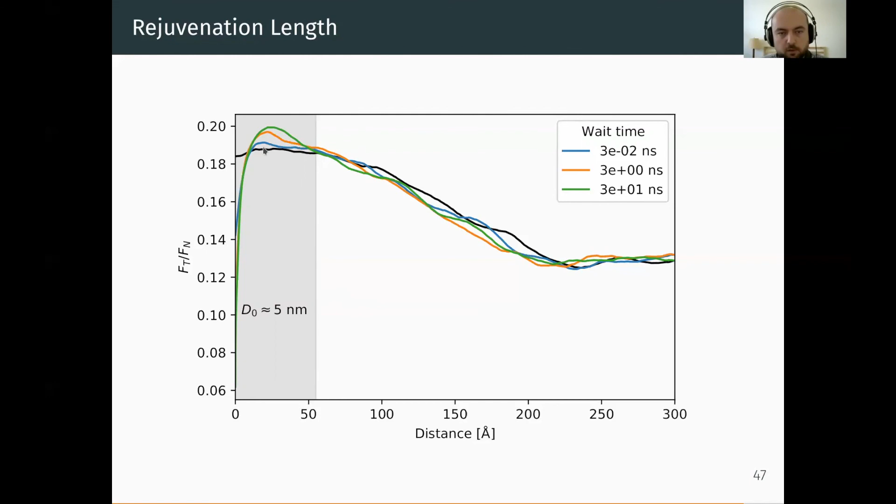What I also measure from those simulations is the magnitude of the increase of the overshoot. I also see, just like in the experiment, a logarithmic aging in the friction force. So this is still work in progress. As you can see, the waiting times here are in the scale of nanoseconds because I'm using molecular dynamics. Time scales of seconds are unfortunately not currently possible.

So this isn't the full story, but I think it's a very nice springboard towards understanding the nanoscale friction mechanisms of those fatty acid molecules. Hopefully this convinces you that atomistic modeling is very relevant for tribology.

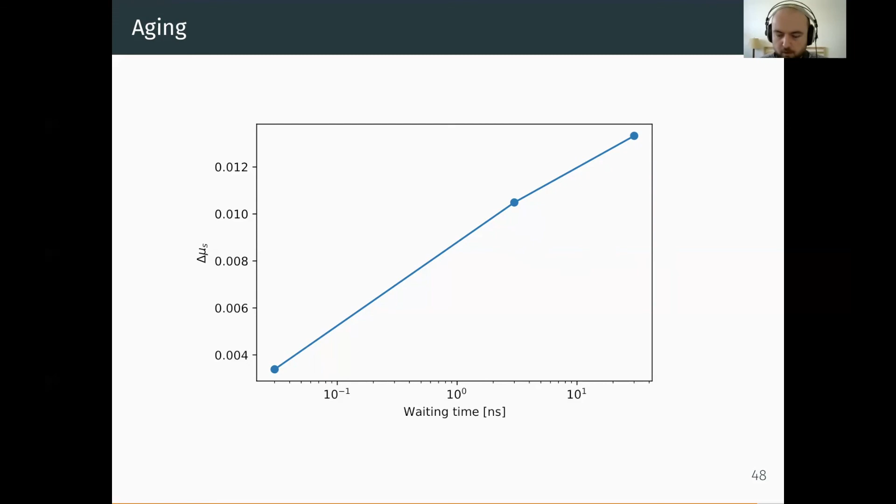So to conclude this presentation, I've shown two different aspects of tribology. One aspect at the continuum scale, where I discussed numerical methods for elastoplastic rough contact and the increase of probability due to plasticity of nucleating cracks at rough contact interfaces. And I also discussed the importance of atomistic modeling to be able to reproduce features observed in experiments and to try to uncover the fundamental friction mechanisms at the molecular scale.

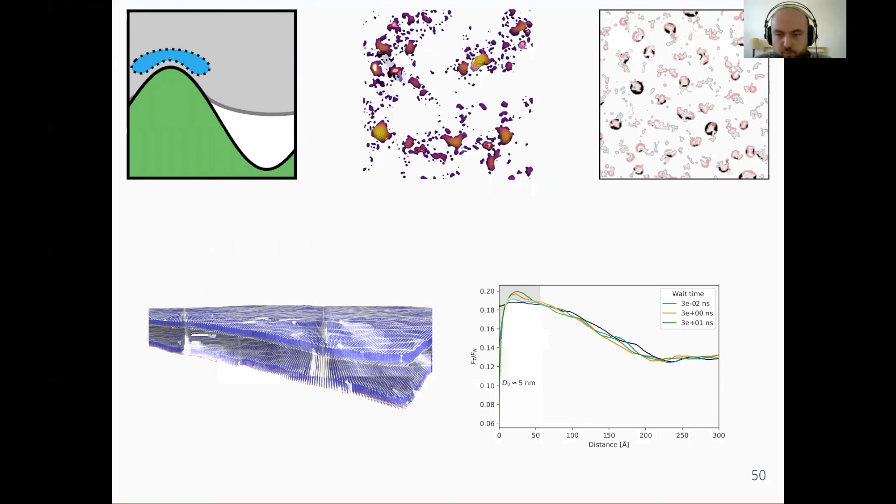There's still a lot to do, but that's it for my presentation today. And with this, thank you for your attention, and I'm happy to take any questions.